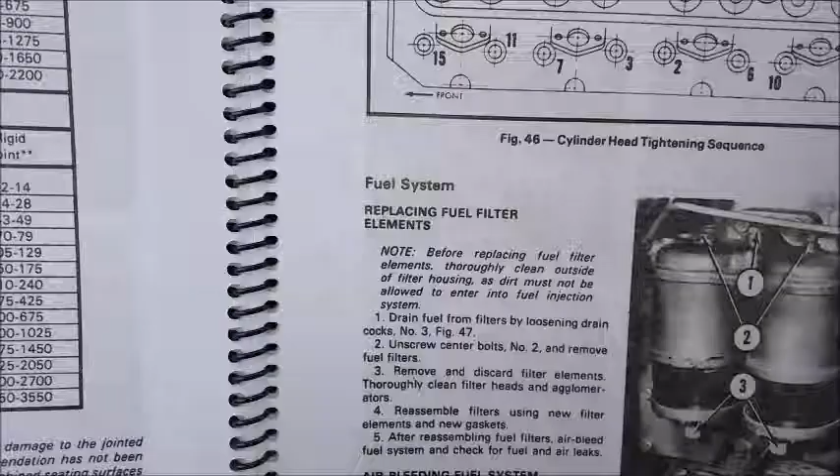Okay, the Massey hasn't run in about 5 or 6 days. It ran for 5 or 10 minutes and then it shut itself off, and then I tried to restart it and I couldn't get it started, so I just left it. Anyways, I'm pretty sure it's either gelled diesel or water in the diesel that's frozen.

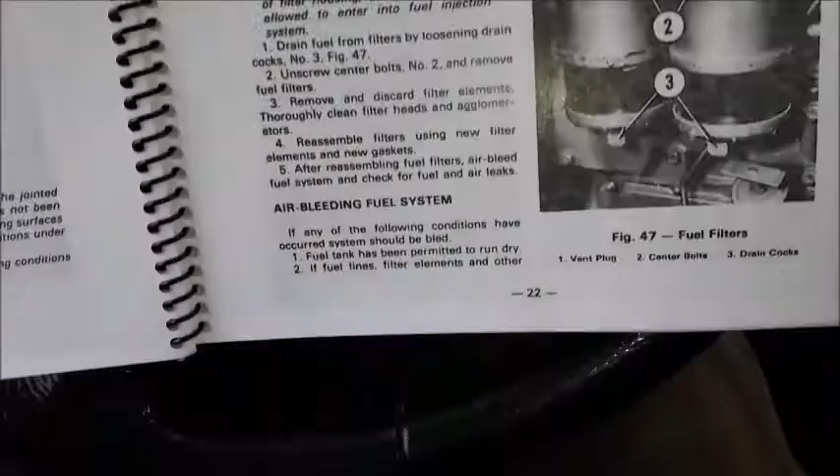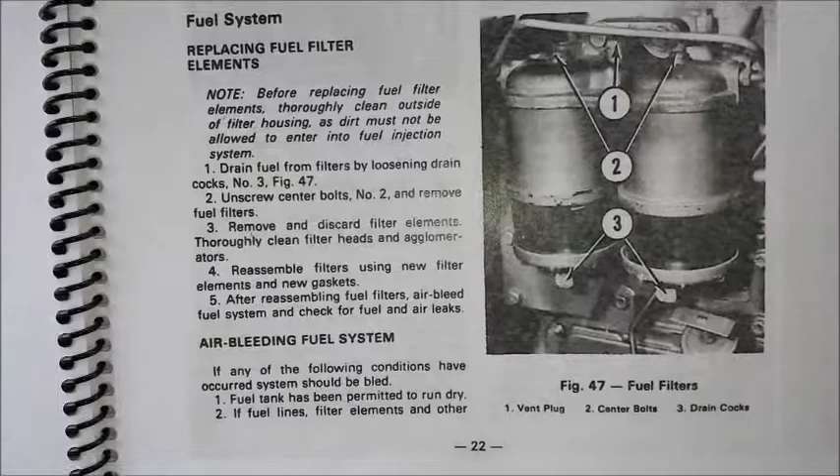So I got a new fuel filter, and anyways, we're going to attempt to change the fuel filter and then air bleed the fuel system, and see if we can get it started.

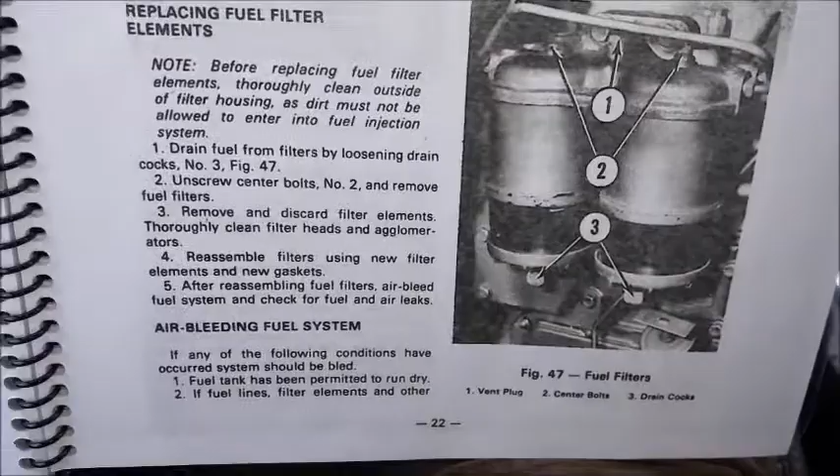It's been plugged in for a week, so it should be warm. I got the heater going, but it's minus 20 according to the dash, so I don't know if the heater's going to be helping much. So anyways, there's the air bleed there. Continues on to the next page.

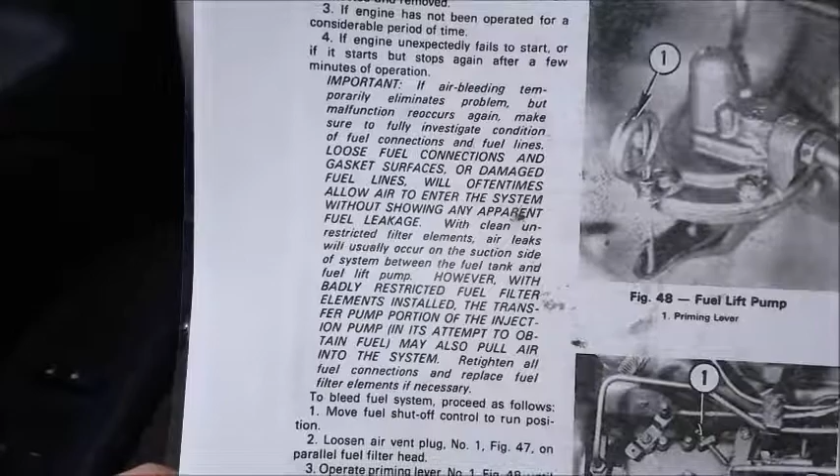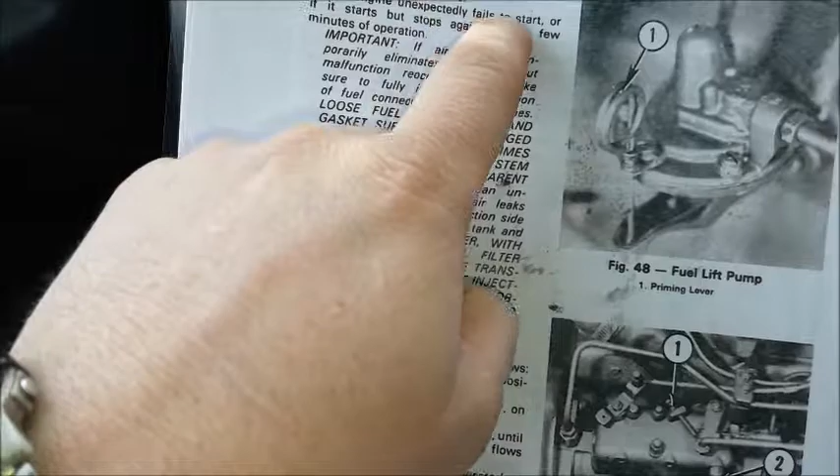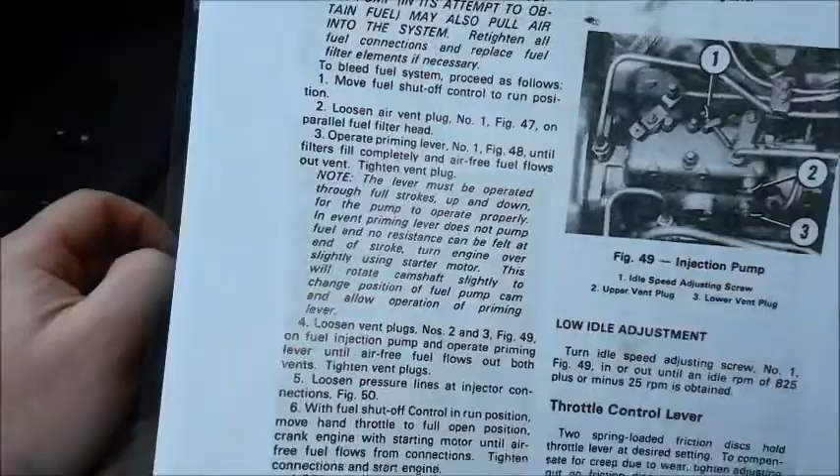So this is kind of what we had: if the engine unexpectedly fails to start, or if it starts but stops again after a few minutes of operation. So I think that's what we've got. Anyways, I don't know, because we bought this tractor in the fall, so I don't know.

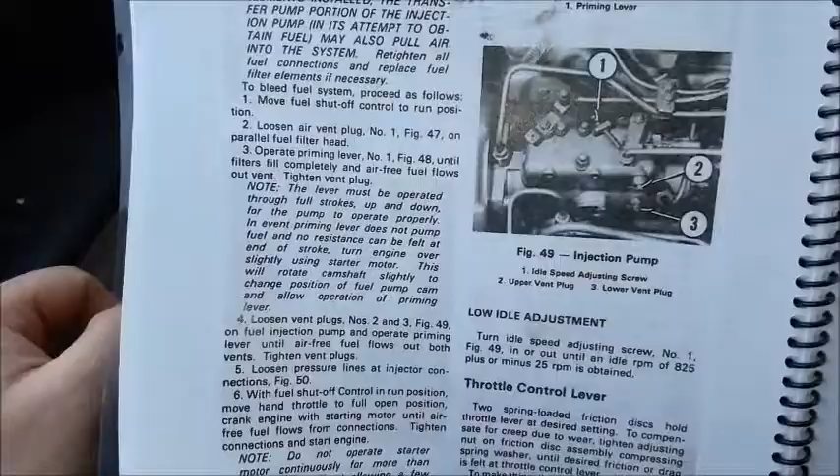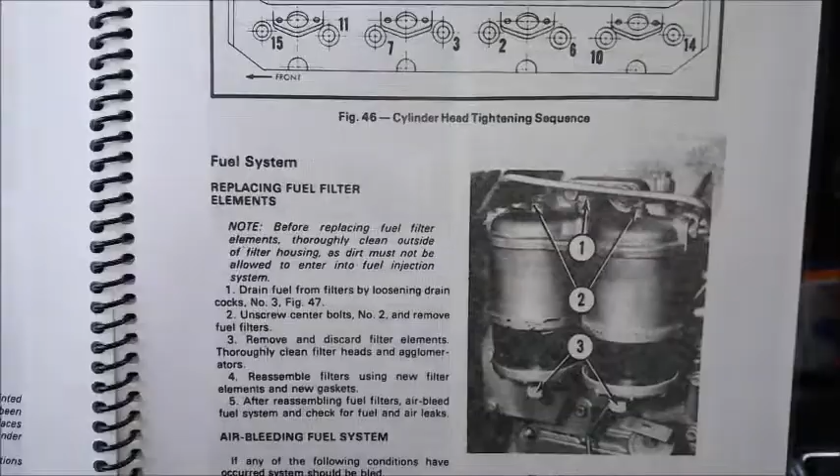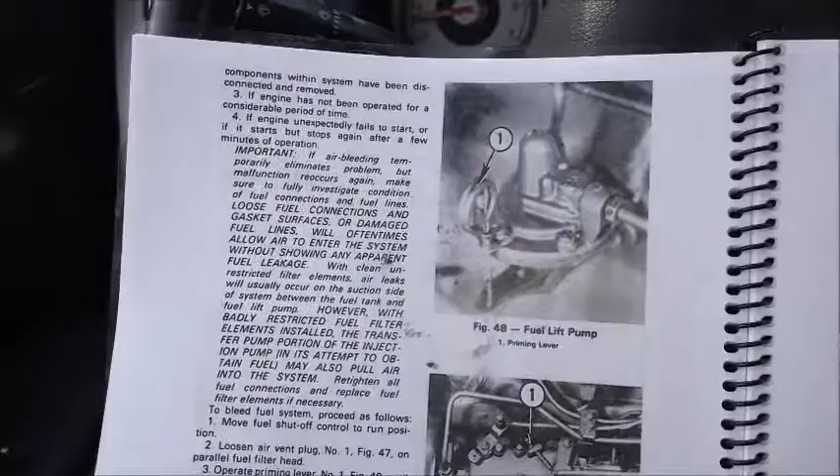What the scoop is, but the fuel system's been changed on this tractor. We don't have these double canisters with the cartridges in them, we have spin-ons. The junker parts tractor has the spin-ons, or the cartridge. So sorry, the spin-ons that we have were adapted to this tractor off of something else.

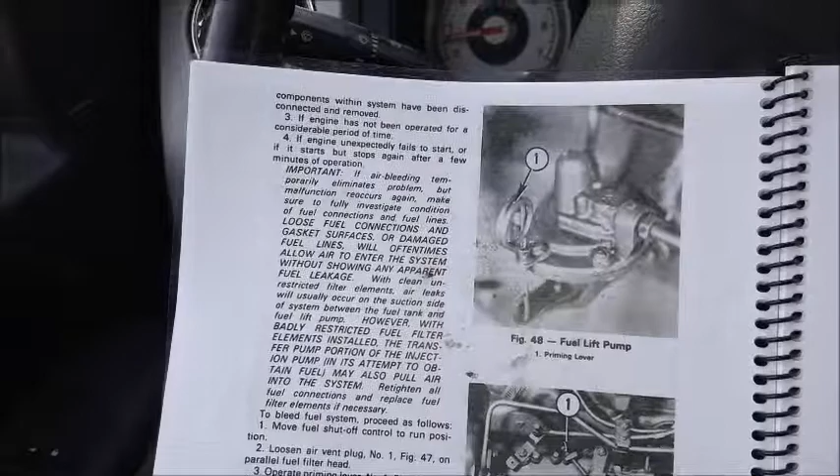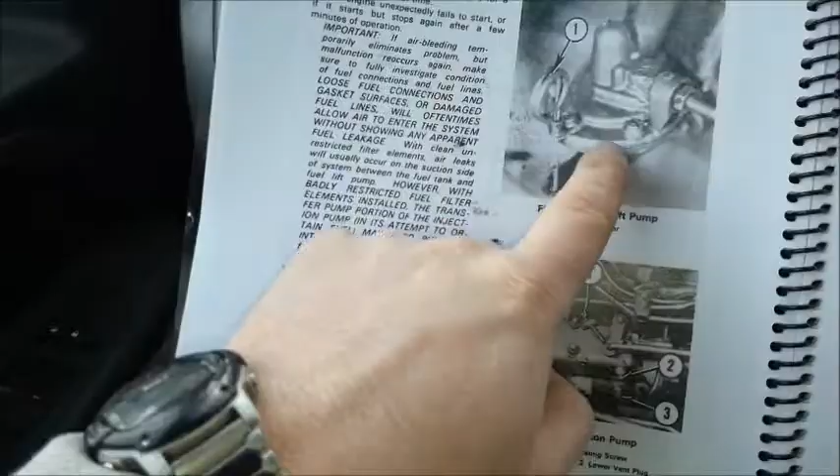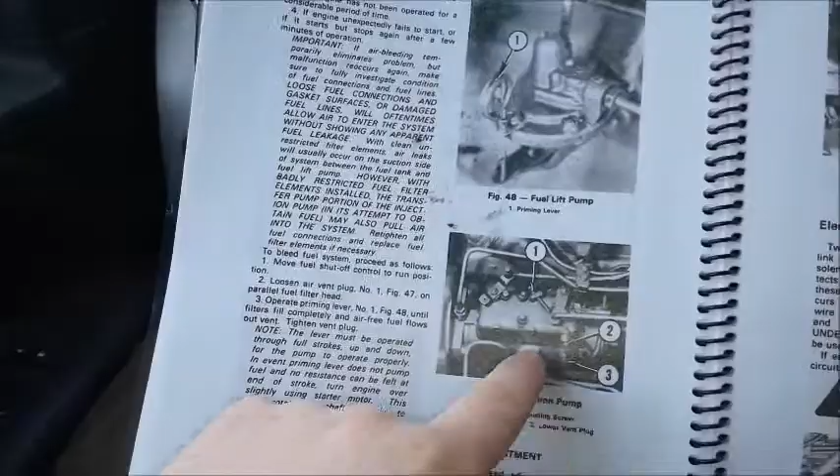If you go off of the FRAM number, it's a P3594 spin-on primary fuel filter. It says it comes off a Case engine, forget what the other engine was, but anyways, there's this lift pump on the side of the block. You basically pull this lever up and down, it primes, and it pushes fuel up to the fuel filters and then over to the injection pump and then up to the injectors.

So I got fresh diesel and a brand new filter, so we're going to try that. Change the filter here in a minute.

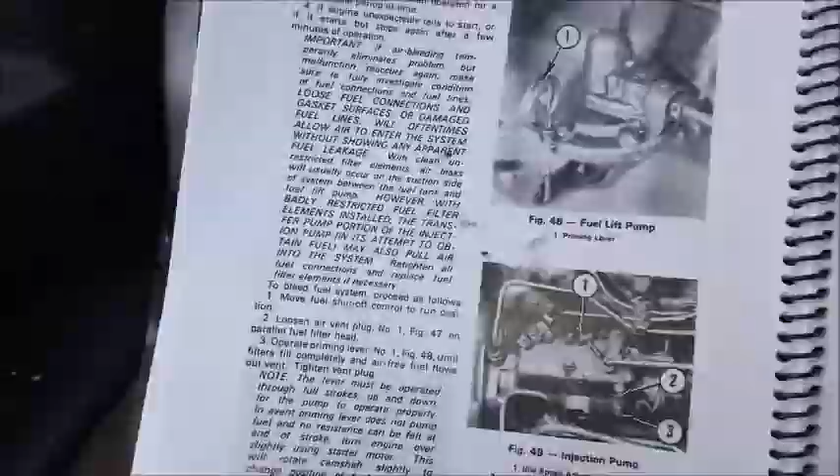Okay, so I got the tractor tarped. I got the flamethrower inside here. It's like having a match in a hurricane, but if you're standing beside it, it's not too bad.

So there's the FRAM fuel filter to spin on, and I gotta take this panel off to get that filter. Well, I can get the filter, but the air bleed is up in here, so I'm just going to pop this panel off here real quick.

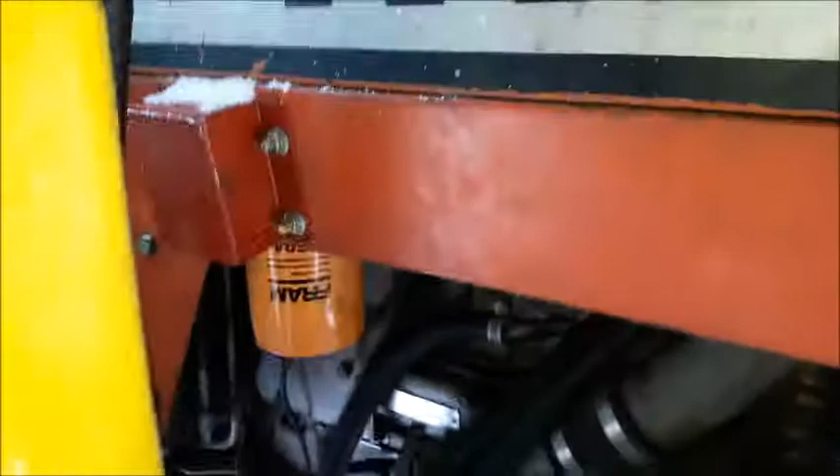Okay, I got the cover off the Massey here, and there's the spin-on fuel filter, and there's the air bleed bolt, I guess, right above it.

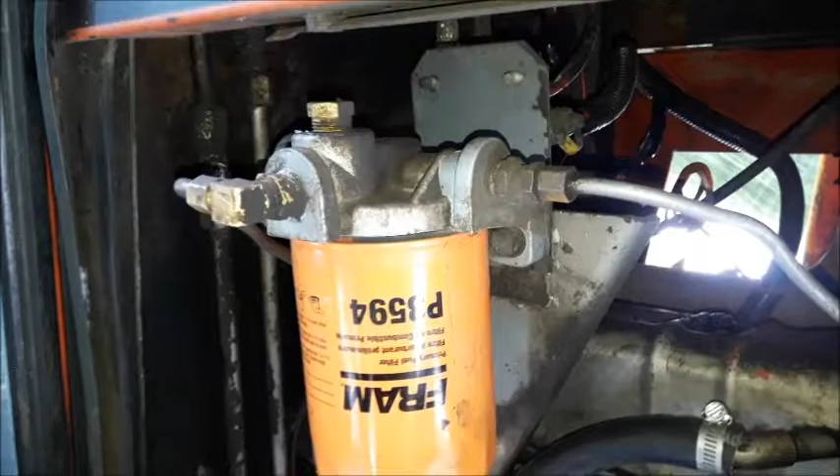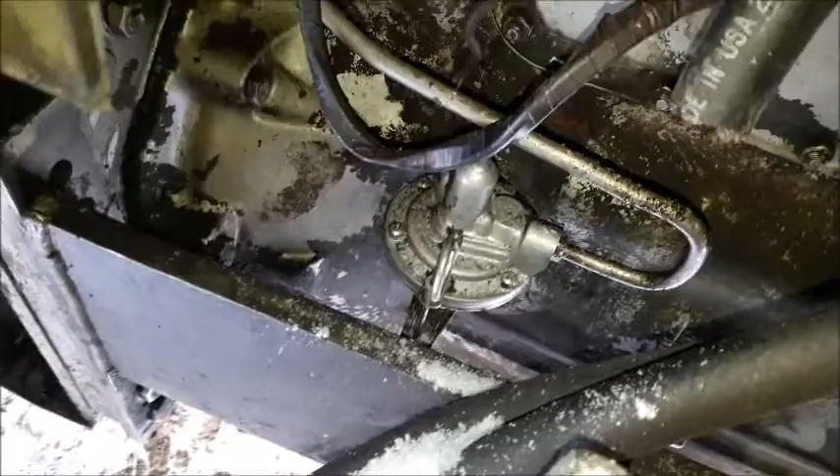So anyways, we're going to change the filter. There's the lift pump down in there. It's driven by the camshaft, so it comes from the tank to the lift pump, from the back of the lift pump up to the fuel filter, from the fuel filter across the engine and over into the injection pump. So it's somewhat straightforward. I'll attempt to take that off now.

Alright, so here comes the fuel filter.

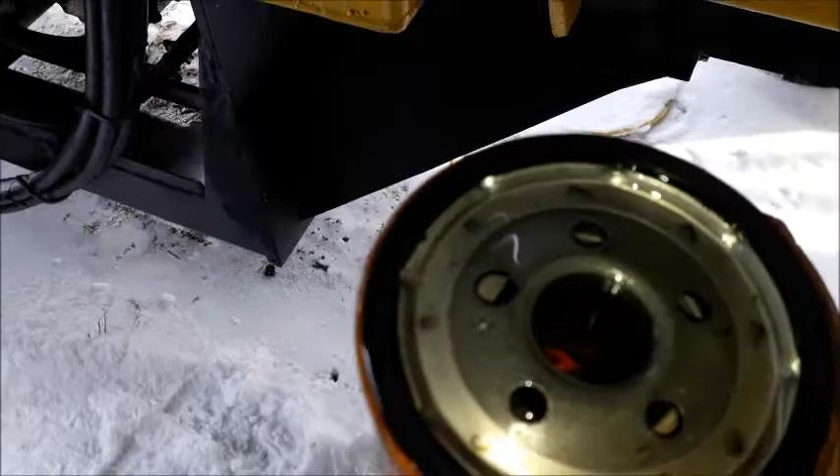Well, it's actually full of purple diesel that's not gelled off. So that may not have been the problem I was hoping it was going to be.

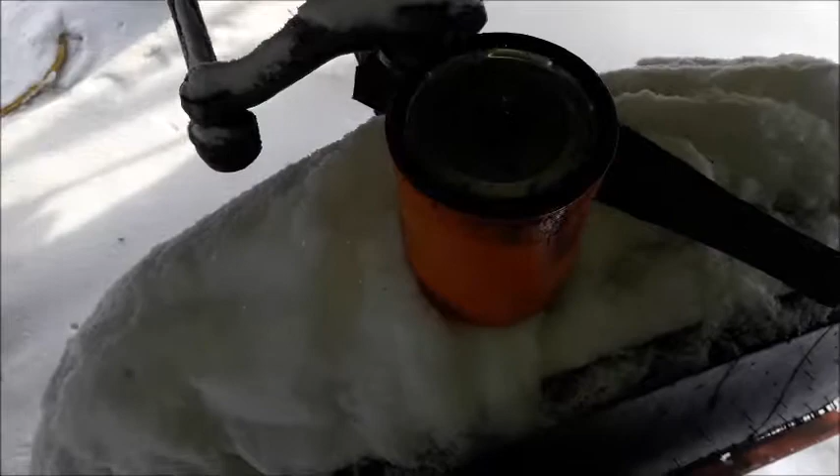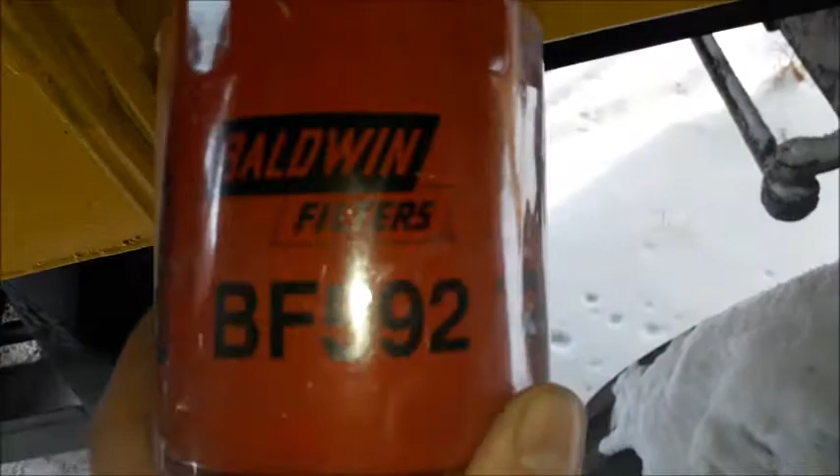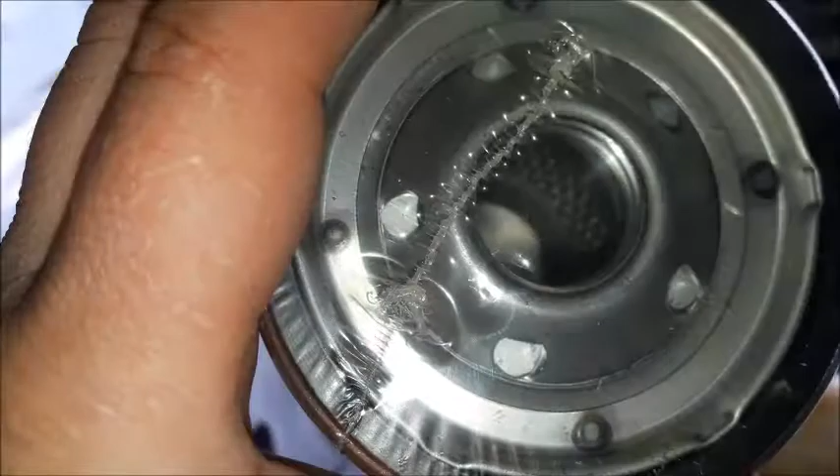So we'll pre-fill a new one. It's not a Fram, it's a Baldwin filter. They looked it up online, it's a direct cross, even though that thread there looks bigger than that thread. Hopefully it just is the way it looks.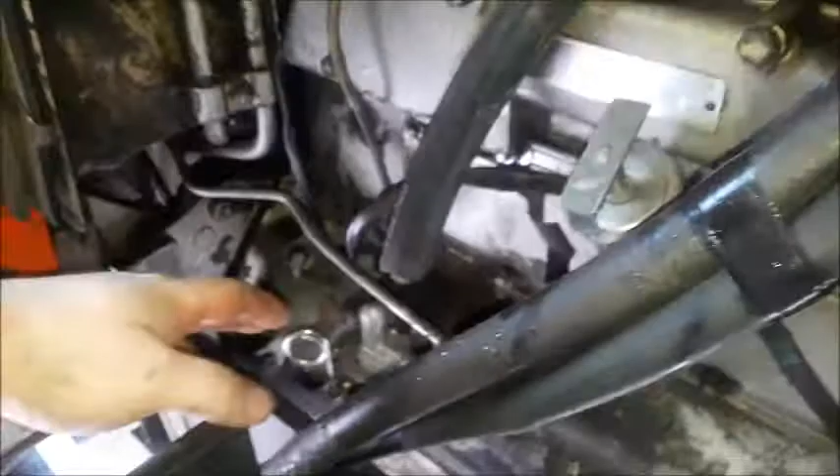Okay, got the Baldwin filter on there, and I primed it using the lift pump. You have to go full stroke on these things, up and down, up and down. So I bled it here at the 90, I bled it on top, and I bled it here.

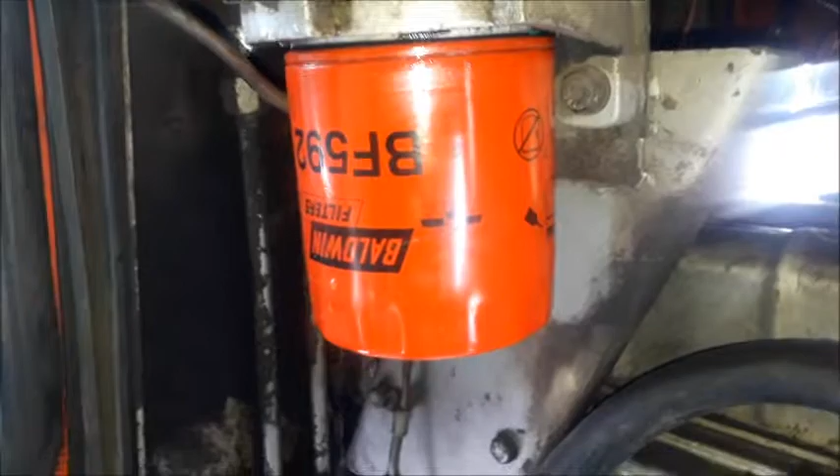So this fuel filter should be full of diesel right now. It was fairly full when I filled it with diesel fuel when I put it on, but then you got a little bit in the filter housing and stuff you got to fill up. So anyways...

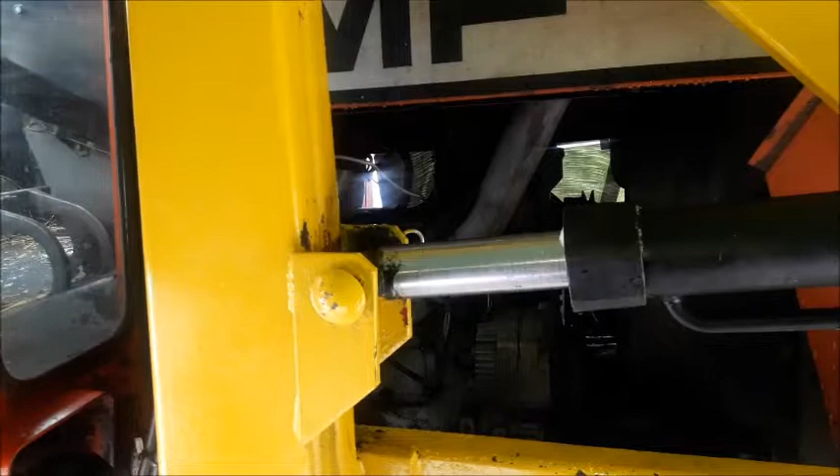I will attempt to start the tractor, and if it doesn't start right away, I'll have to bleed the injectors. They're a little bit more difficult because of where they're located, but it's more or less the same process.

Okay, I got the battery clamps on, running off the truck. The dog's in the cab there monitoring the battery charging activities. So I just revved the truck up using my snow brush to about 3,000 RPM. So when we start to crank on this thing, it'll pull that truck down.

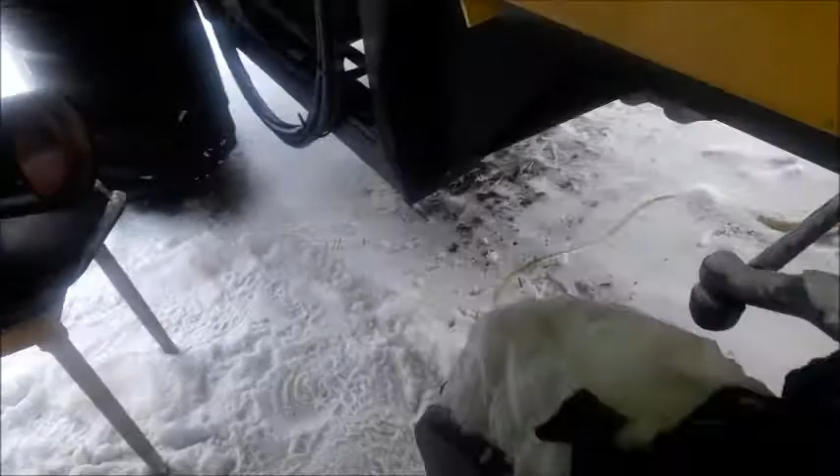So just one final look over here. Everything still looks alright. Got the flamethrower still blowing hot air through here. It's getting the temperature up, it's starting to melt the snow on the top of the hood. So let's go get this thing started.

Okay, so I tried her twice, she still didn't want to start. So I cracked the injector nuts here, going to the injectors, and there's no fuel dripping out of them, so I'm assuming it's dry. This one here is always wet, and it had a little bit of fuel at first, but it doesn't have anything now.

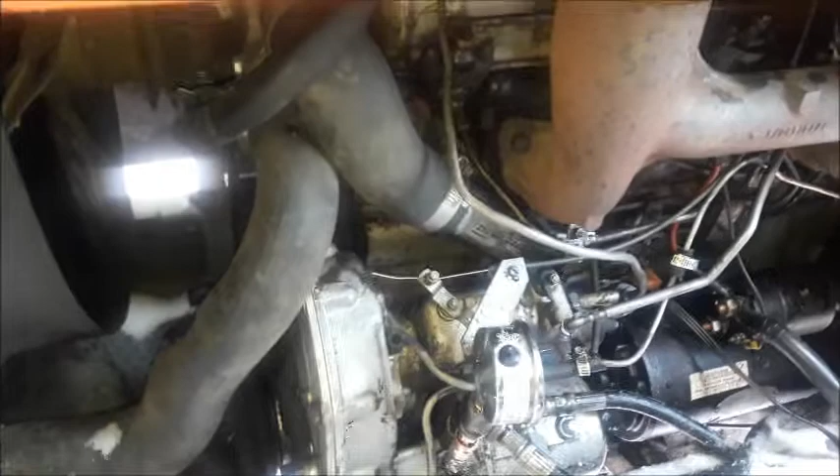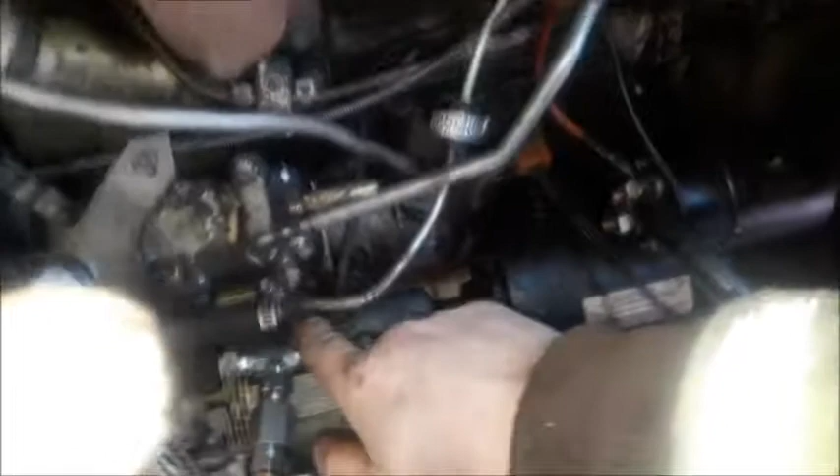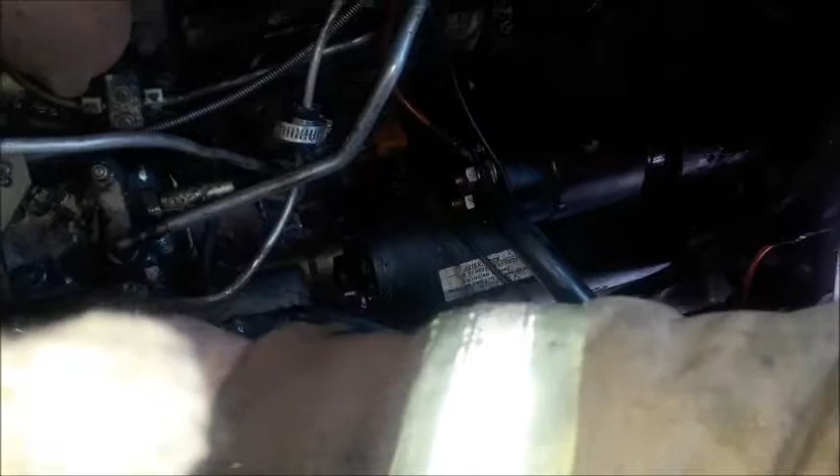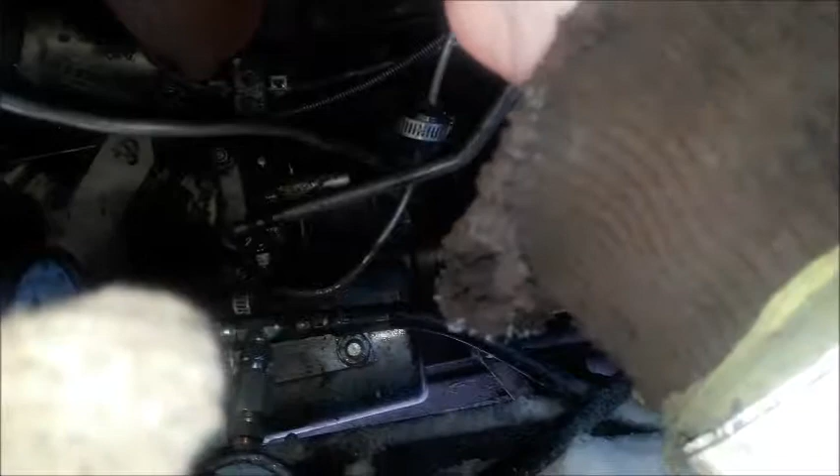According to the manual, you only got to crack 2 of them, and once you get fuel up to them, it'll kind of self-prime the other 2 and push the air out. So let's try this. Okay, I got a little ahead of myself, I reread the manual - you have to crack these 2 vent plugs on the side of the injector pump, this one down here, and this one right here. And you got to use the lift pump so you get air-free fuel coming out of them. So we don't have fuel over to the injection pump because they're dry as can be. So we get fuel to here, and then we crack the injector lines at the injectors. So I tighten them back up.